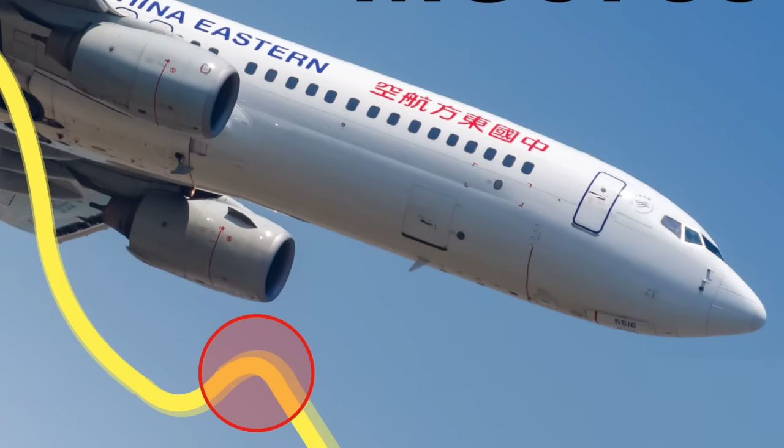On the 21st of March 2022, China Eastern Airlines flight MU5735 departed Kunming for Guangzhou. At 14:20:55, radar showed the aircraft leaving its cruising altitude of 29,100 feet. Air traffic control called the crew immediately, but received no reply. What followed was not a normal descent. Just 45 seconds later, the aircraft had descended to 11,000 feet at a ground speed of 545 knots.

Then the radar signal disappeared. The aircraft crashed near Langnan Township in Guangxi, killing all 132 people on board. The impact site was a small, deep crater, consistent with a high-energy, steep descent.

To understand what happened, we reconstructed the descent. The descent takes 120 seconds. We're showing this at 10 times speed. At around 7,000 feet, the aircraft begins to recover, but then it dives again.

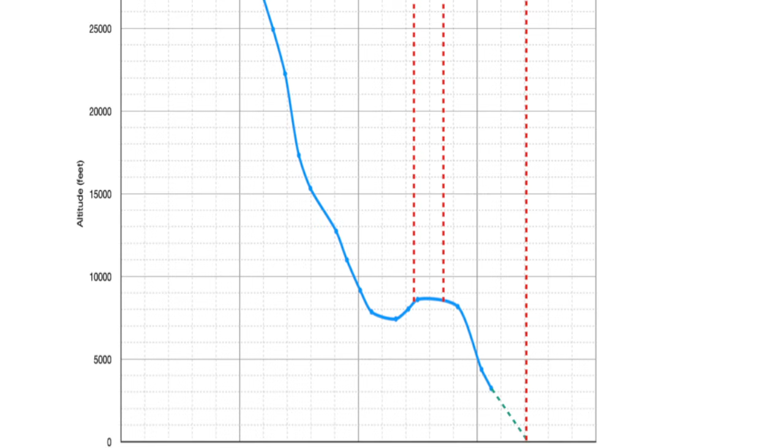Compared to a normal descent on this route, the aircraft was descending about 15 times faster than expected, reaching a maximum descent rate of around 30 times faster than normal. Over those 2 minutes, the aircraft traveled 27 kilometers horizontally. The vertical distance was 9.3 kilometers, giving an average flight path angle of approximately 19 degrees.

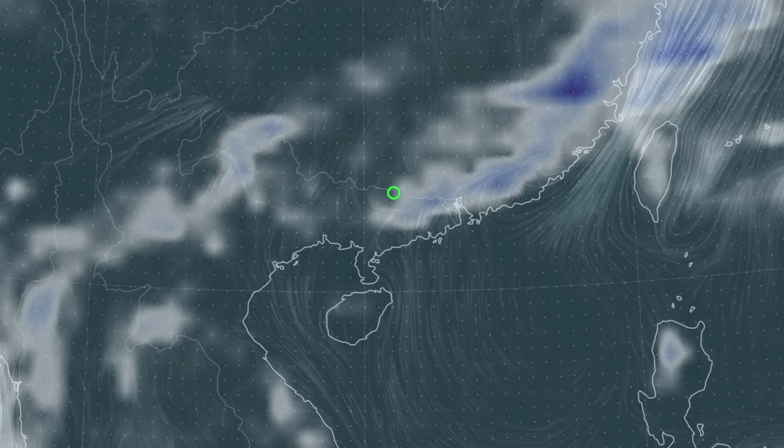The weather in the area was fine at the time, 29 degrees Celsius, light winds, light rain. The top of descent occurred in the same area as previous flights on this route.

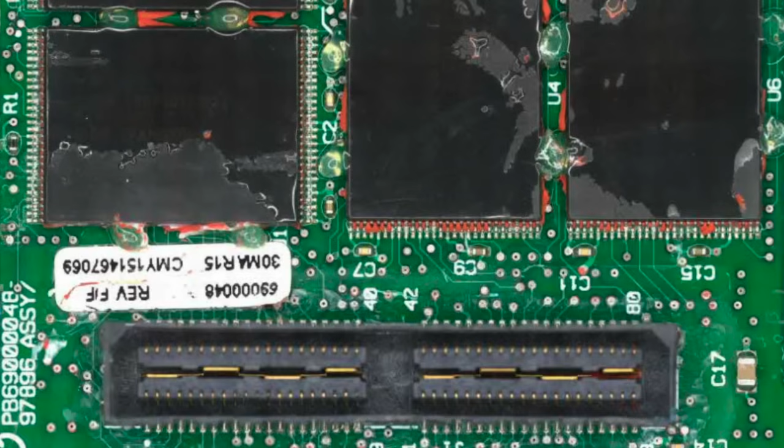Major pieces of the plane's wreckage, including the vertical stabilizer, left and right engines and wings, and the landing gear, have been recovered. The plane's 2 black boxes were severely damaged in the crash, and data retrieval and analysis was still underway a month after the crash, when the preliminary report was released.

The report reveals that the flight's crew and maintenance personnel met the relevant standards, and the plane's airworthiness certificate was valid. There were no items on board that had been declared as dangerous goods, nor any forecasts of dangerous weather. Before the plane deviated from the cruising altitude, the radio communications between the crew and the air traffic control department did not show any abnormality.

According to the preliminary report, the investigation team will continue with its work, which includes debris inspection and flight data analysis, to find out the cause of the accident in a scientific and meticulous manner.

That was written now 4 years ago. The initial response from the CAAC was published on the 22nd of March, 2022. These are simply operational, political, and safety control communications, not investigation outputs. The crash was confirmed, the emergency activation, and leadership directives and safety messaging. The only information: the passenger count, 123 plus 9 crew. Confirmation of the crash, activation of emergency response, and instructions from leadership. Zero investigative data.

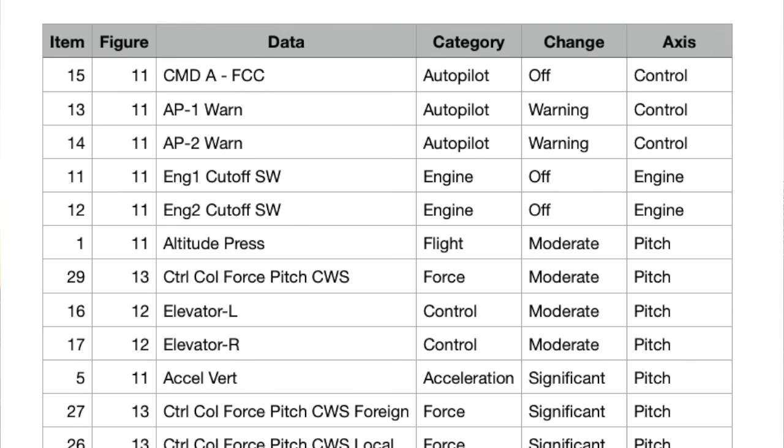In May 2026, previously unreleased NTSB recorder recovery material associated with the investigation DCA 22 WA102 became publicly accessible through an FOIA disclosure. The released materials included flight data recorder parameter plots, cockpit voice recorder recovery documentation, recorder power loss analysis, and flight control and force traces during the initiating phase of the event.

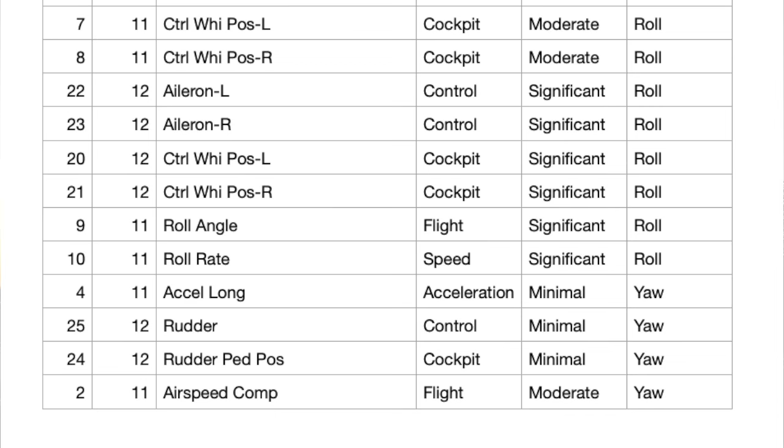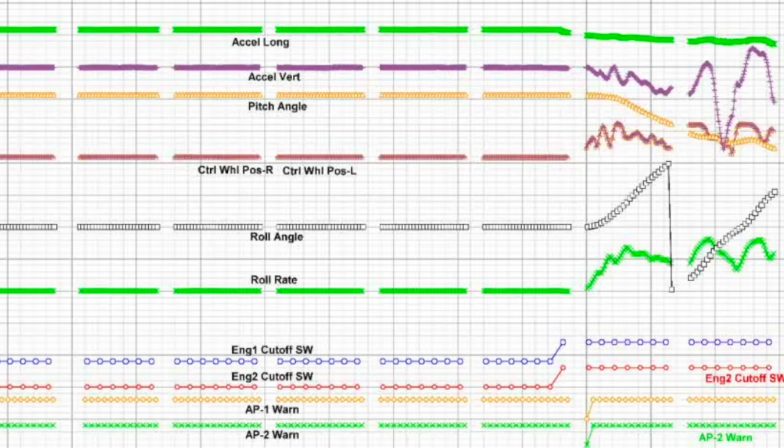The released plots show that while cruising at approximately 29,000 feet, both engine fuel cutoff switches moved from run to cutoff. These switches are guarded controls designed to resist inadvertent movement. The switch transitions preceded the onset of the major descent sequence. Engine N2 speeds decreased afterward.

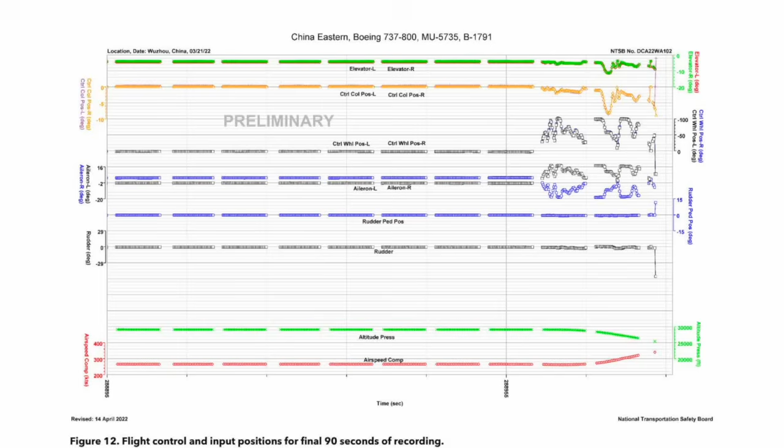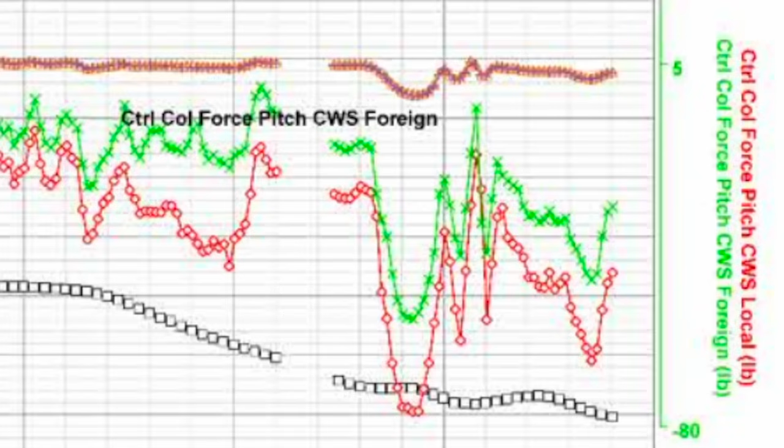Autopilot disconnect indications followed. Active flight control inputs continued during the initial descent sequence. The released FDR data records approximately 23 seconds after the fuel cutoff event, before recorder power loss following engine spool down and generator cutout. The NTSB documentation also states that the cockpit voice recorder recovery quality was excellent on all channels, and the CVR continued recording on battery backup power after aircraft generator loss.

This information materially changes the publicly available evidentiary picture. However, the full synchronized FDR dataset has not been released publicly. No official CVR transcript has been published, and no official final accident report has been released by the CAAC. The released recorder plots alone cannot establish crew decision-making, cockpit interaction dynamics, or the identity of the individual who moved the switches. The disclosed data strongly supports the following high confidence conclusions.

The primary flight control linkages remained mechanically intact. The airplane was under active manual control during the upset. Significant forward column force was applied. Elevator and aileron movement corresponded correctly to cockpit inputs. The upset was not solely an autopilot-driven event. The aircraft response was dynamically consistent with the commanded control inputs.

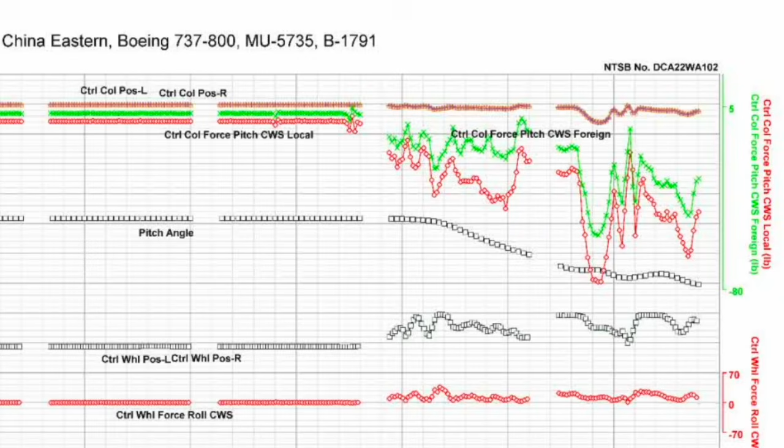We can also say with moderate confidence: one control station may have been exerting greater force than the other. There may have been partial opposing inputs or resistance. The forces appear more consistent with sustained human input than transient malfunction.

What we cannot conclude definitively is which pilot made which input. We cannot determine intentionality or psychological state, and whether a control struggle definitively occurred, and whether the inputs represent a deliberate dive command or to what extent failed recovery attempts.

The MU5735 FDR data released by the NTSB is very difficult to reconcile with a purely passive aircraft upset or a simple mechanical failure scenario.

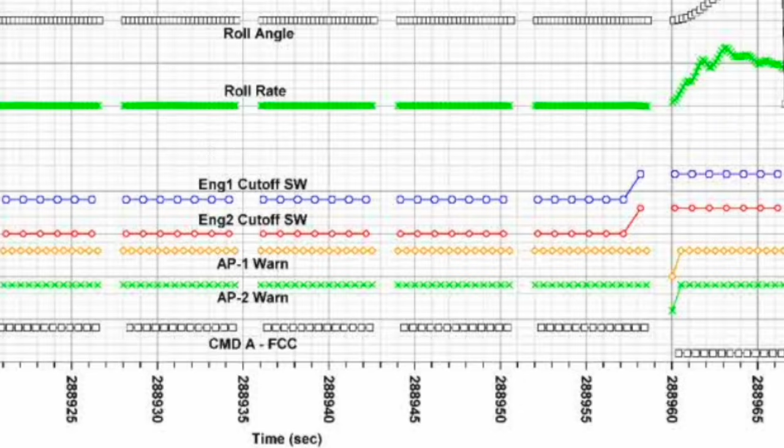The force-position-response relationship strongly indicates active human control inputs throughout the critical portions of the event. The disclosed FDR data, especially when combined with dual-engine fuel switch movement to cutoff and no apparent relight attempt, is strongly consistent with deliberate crew action and difficult to explain by ordinary mechanical failure, automation anomaly, or inadvertent upset alone.

Only the release of the full FDR data and the CVR transcript will answer the open questions. The CAAC should release the complete synchronized recorder evidence in order to resolve the remaining causal and human factor questions with high confidence. The released FDR interval captures the initiating sequence, but not the full descent chronology through impact.

So what information is being withheld? Based on Annex 13, the following almost certainly exists internally, even though CAAC has not released it publicly.

They released the initial information package that there was an accident and a very brief summary, one page, but then the public trail stops. There should be a formal accident notification package, which they should have sent to the ICAO, China as State of Occurrence, Operator and Registry.

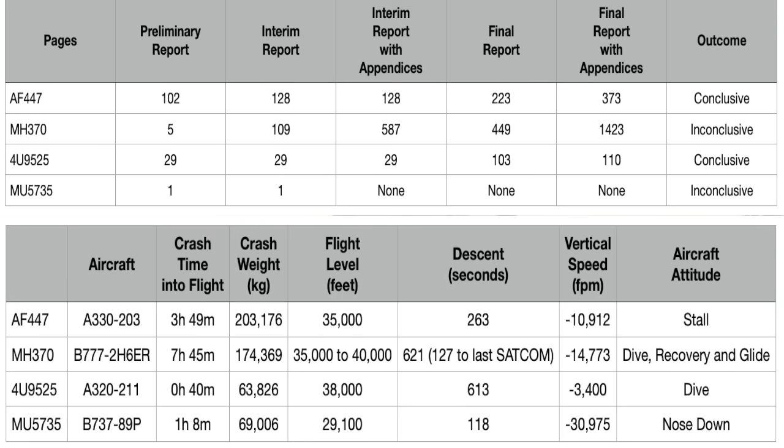Annex 13, Chapter 7 requires an accident data report to ICAO as soon as practicable after the investigation, and this is for any aircraft accident for an aircraft over 2,250 kilos.

If the investigation is still formally open, this may be incomplete or not yet finally transmitted, but the ADREP data file work product should exist.

There will also be a draft final report, but no interim report followed. Annex 13 expects a final report to be made publicly available as soon as possible, preferably within 12 months, and if not, states are expected to release progress information on an annual basis.

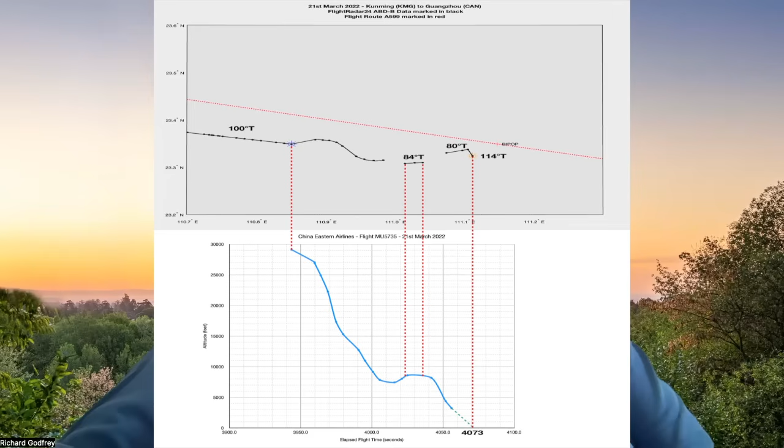Since no final report has appeared publicly, it would be reasonable to expect an internal draft or working materials exist, even if there's not a complete and approved final report. The following records would normally be expected to exist in an Annex 13 investigation, but they have not been released publicly by the CAAC. Their contents, completeness, and conclusions cannot be verified from the public record. These are not necessarily Annex 13 public documents, but they are typical investigation work products.

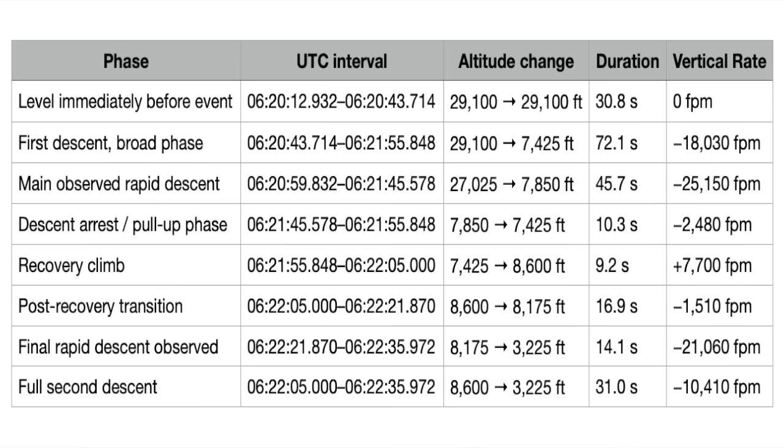We do have now the FDR and the CVR handling records from the NTSB. The public preliminary briefing said both recorders were severely damaged and that data retrieval and analysis was underway. We now know from the NTSB the CVR data was fully recovered, and the FDR data was partially recovered. That implies an internal chain of custody records, recorder condition reports, readout attempts, data recovery logs, and analysis notes.

Next, there will be a radar and ATC evidence package. The CAAC preliminary page gives precise radar times, altitude, speed, and heading. That implies underlying radar plots, ATC recordings, controller transcripts, communications logs, and surveillance data reconstruction.

There will also be wreckage distribution and impact site documentation. The CAAC states the report covered wreckage distribution and identifies the main impact crater, recovered major wreckage, engines, wings, landing gear, and stabilizer. This implies site maps, wreckage tagging, recovery inventories, photo logs, component examination sheets, and probably a wreckage field database.

CAAC publicly states the crew and maintenance personnel met relevant standards and the airworthiness certificate was valid. That conclusion requires internal records on licenses, training, medicals, duty and rest rosters, maintenance history, MEL and CDL status, defects, and continuing airworthiness. The CAAC states no declared dangerous goods and no dangerous weather forecasts were present. That implies cargo and load documentation, dispatch release, meteorological package, SIGMET, TAF, METAR review, and possibly satellite and radar weather review.

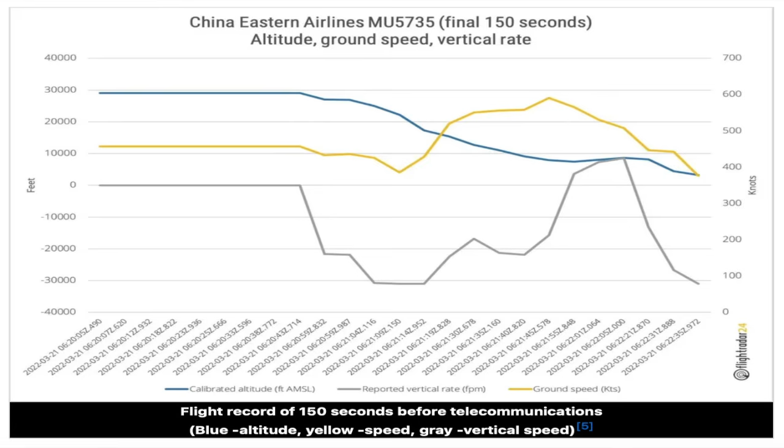Flight Radar 24 provides what we call Tier 2 data. Tier 1 is the official reports, but Flight Radar 24 ADS-B data constitutes independently collected, non-official surveillance data derived from aircraft transmissions. While not part of the official investigation record, it is generally considered technically reliable for reconstructing the aircraft's trajectory, subject to the normal ADS-B limitations.

Flight Radar 24 wrote an article on the crash and included the ADS-B-based trajectory reconstruction and high-frequency granular data at 2 Hz sampling. Aircraft reported parameters such as altitude, vertical rate, and position.

The key factual points they state: the cruise was at 29,100 feet pressure altitude, a rapid descent beginning at 0620 UTC, a brief recovery to 8,600 feet, and then a second rapid descent. Their last data point was at 3,225 feet. They also explicitly clarified the vertical rate comes directly from the aircraft computers.

ADS-B has its limitations, and it is not safety certified data, susceptible to reception gaps, latency, and decoding artifacts. But the vertical rate was derived from onboard sensors. However, ADS-B is not equivalent to the flight data recorder data.

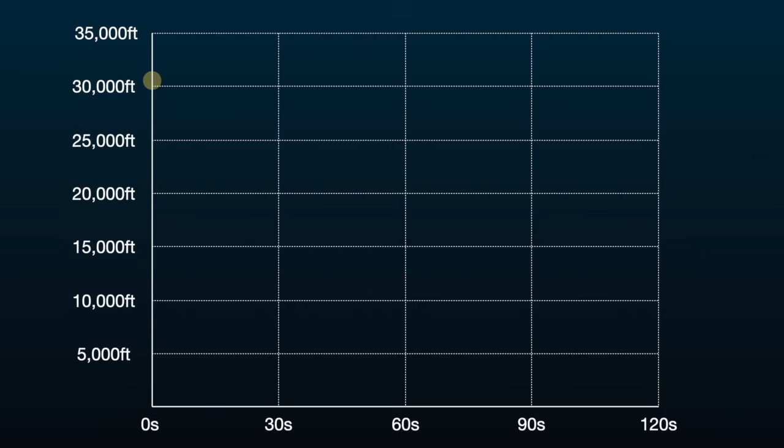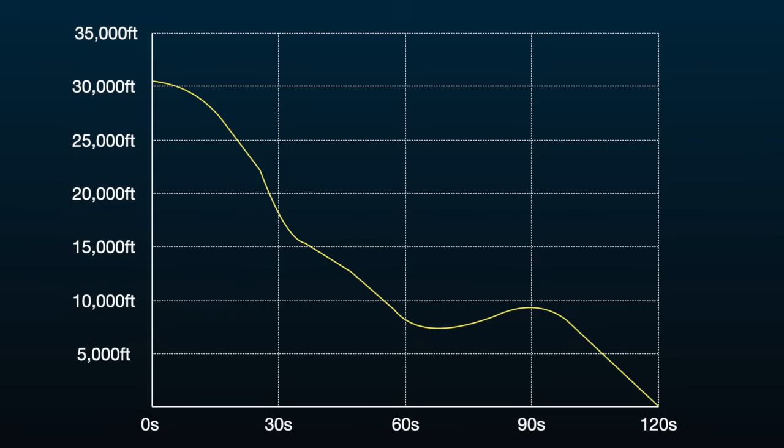Independent Aircraft Investigations has conducted an analysis of the horizontal and vertical trajectory based on the publicly available ADS-B data, derived from the Tier 2 surveillance data, and is not part of the official investigation record. In total, there were 17 ADS-B data points over the last 2 minutes of flight.

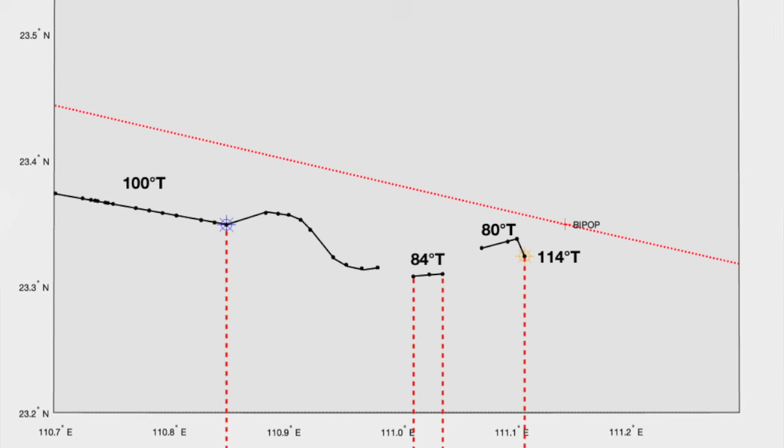The track over the ground is shown, but it's not necessarily the aircraft heading, because it depends on wind strength and direction. The steepest sustained descent phase observed in the ADS-B data is the first main rapid descent, averaging about 25,000 feet per minute over 46 seconds.

The final observed descent also becomes very steep, averaging about 21,000 feet per minute over the last 14 seconds. These are ADS-B-derived average rates between received data points and not FDR-validated vertical rates. The peak instantaneous vertical rate may be higher than these averages, but cannot be reliably determined from ADS-B sampling resolution.

The maximum recorded vertical speed was 30,976 feet per minute, and this speed was reached 3 times, twice during the initial descent and again just before the crash.

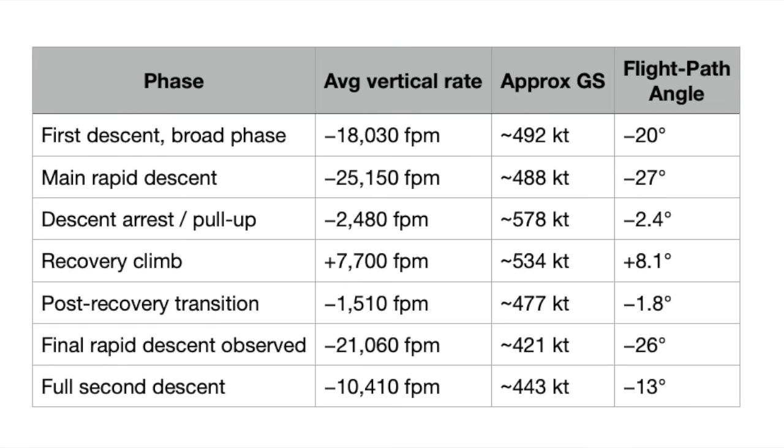We also use the ADS-B data to derive the flight path angle. We took the ground speed and average vertical rate data, and the main descent phase imply flight path angles of approximately 20 degrees to 27 degrees. The recovery phase implies a brief positive flight path angle of about +8 degrees.

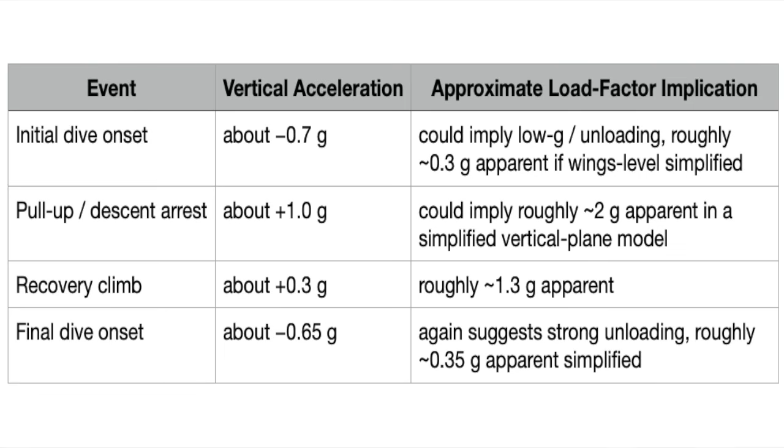The associated vertical acceleration changes suggest a kinematic transition consistent with low G and unloaded flight, followed by a possible pull-up in the order of 2G in a simplified vertical plane model. These are not FDR-derived load factors and should be treated only as kinematic implications from ADS-B data. Vertical accelerations are estimated from changes in vertical rate over time and do not represent direct load factor measurements.

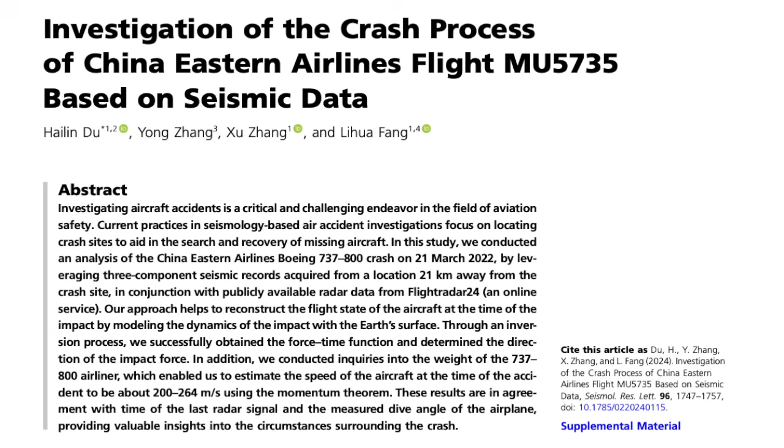A peer-reviewed study published in the Seismological Research Letters analyzed the crash using seismic waveform data recorded at a station approximately 21 kilometers from the impact site. This analysis uses independent ground motion measurements, applies waveform inversion techniques, and is also not part of the official investigation record. The key findings from that research: an estimated impact dive angle of 38 degrees, an estimated impact speed of

200 to 264 meters per second. That's 390 to 513 knots. An estimated peak impact force of 8.8 times 10 to the 7 newtons. An estimated impact time of 14:22:38 local time. And the study finds that the impact was not vertical.

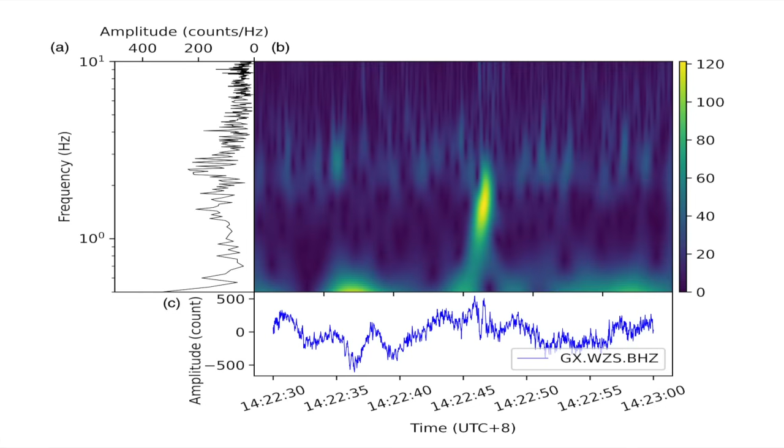The descent angle is consistent with the radar-derived estimates. The limitations of the study are also mentioned. It's only based on a single seismic station, and its study was dependent on several model assumptions and requires validation against the flight recorder data.

However, the study on the seismology aligns almost precisely with the kinematic study from the Flight Radar 24 data. The Boeing 737-800 aircraft's descent was already very steep during the main ADS-B descent phase at around 27 degrees, and then is consistent with further steepening towards impact, reaching approximately 38 to 39 degrees. The 39-degree value based on kinematic estimate is very close to the 38-degree value based on the seismic data.

So what is our conclusion? The publicly released NTSB recorder data materially changes the evidentiary picture surrounding flight MU5735. The released flight data recorder plots indicate that while cruising at approximately 29,000 feet, both engine fuel cutoff switches transition from run to cutoff prior to the development of the steep descent sequence.